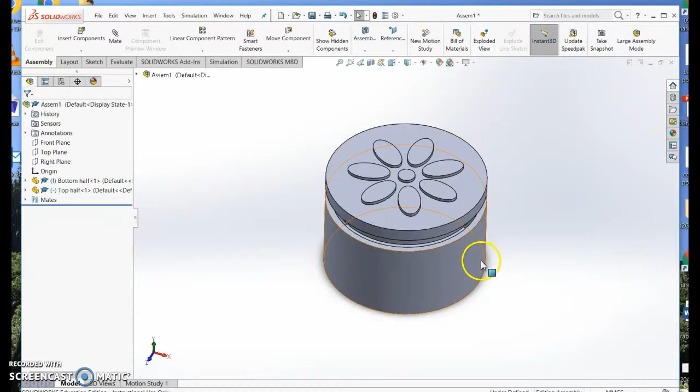Okay, so this is using a program called Solidworks to create a three-dimensional box that you're going to be able to 3D print. So here's a little circular box I've created with a lid. Now I'm just going to take you through how you can create a box very similar to this.

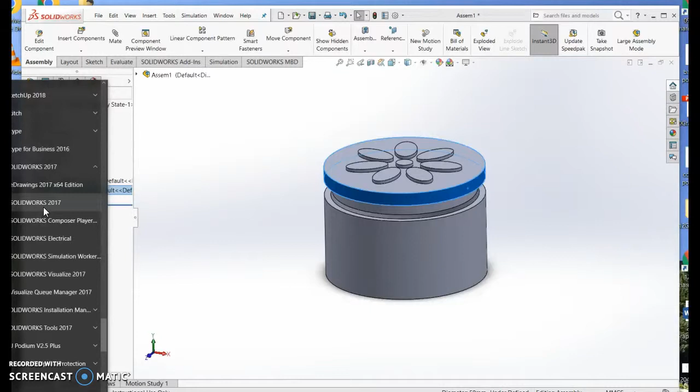The first thing you're going to need to do is find the Solidworks software. So go to where all your applications are, scroll down to Solidworks, and it's Solidworks 2017 that you want to open. Once you've got it open, you need to create a new part.

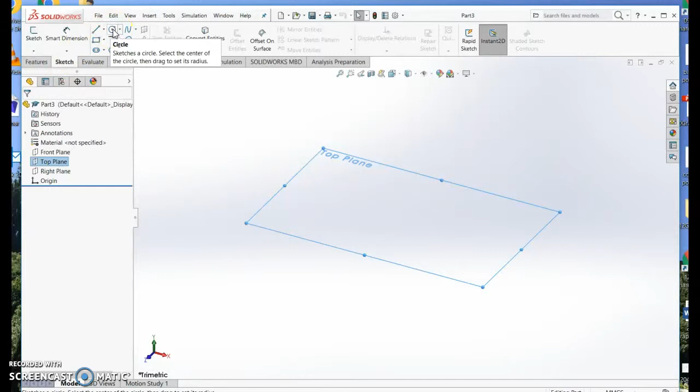Okay, so Solidworks works off starting to draw sketches on planes, and then you turn them into 3D features. So these are my main planes I can choose from: front plane, top plane, right plane. We're actually going to start drawing on the top plane. So you pick a plane, start a sketch. These are my sketch tools here. And in this case, we're going to choose a circle for a start. Attach it to the middle, just so it knows where it is in space.

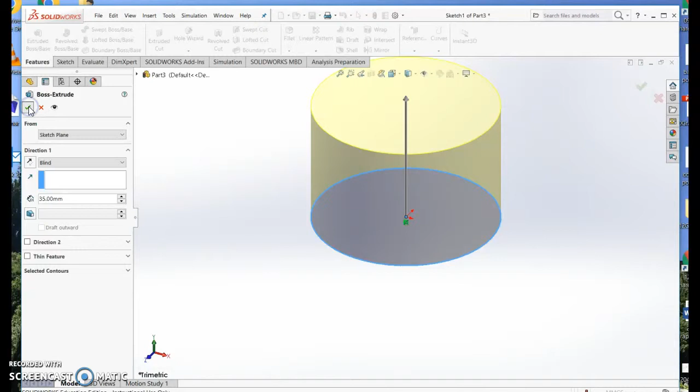And you want to make it with a radius of about 25-26 millimeters. Tick. So I've done my sketch. Now I turn it into a 3D feature by extruding. And I can click up the right amount that I want, or I can type in. So maybe I want it 35 millimeters tall. And tick that. Try hitting the F key, F for fit, and it makes it fit to the screen. Z zooms it out, and Shift Z zooms it in. So here's my beginning of my box shape.

Now what I want to do is cut it in half to make a top half, a lid, and a bottom half. So now I'm going to choose the front plane to sketch on, which is right in the middle. If I press down the wheel of my mouse, I can spin it round, so I'm looking straight on at it. So I've picked my plane, I go to my sketch tools, and I'm going to draw a cut line, and I want it going right the way across. Whoops, select the sketch tool.

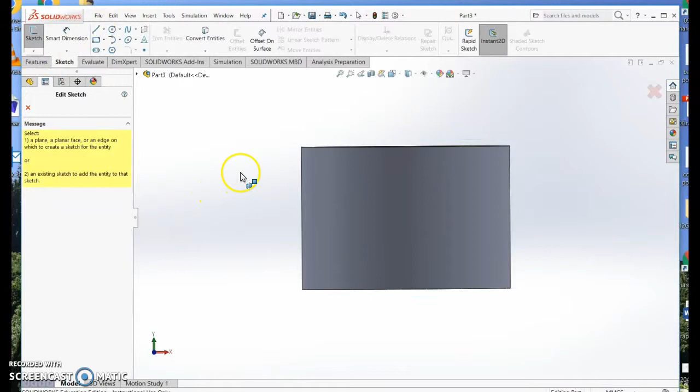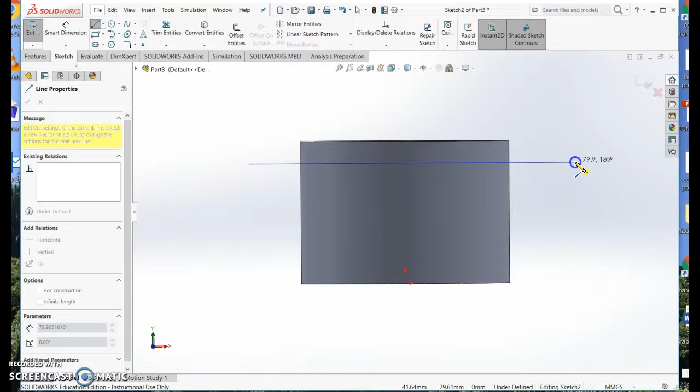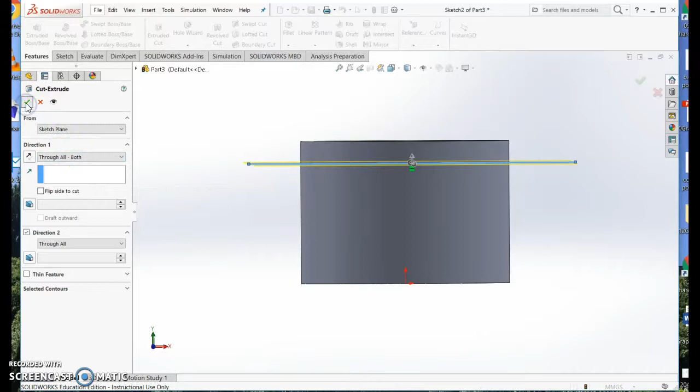Select the line sketch tool, and I'm going to draw a line going horizontal. I can tell it's horizontal because it gives me a little symbol and tells me it's 180. Now I need to make sure the line is hanging out each edge. Now I turn it into a 3D feature, which in this case I want to cut the object in half. Down in my properties here, I want to choose through all, both. Tick, and it's cut off the top.

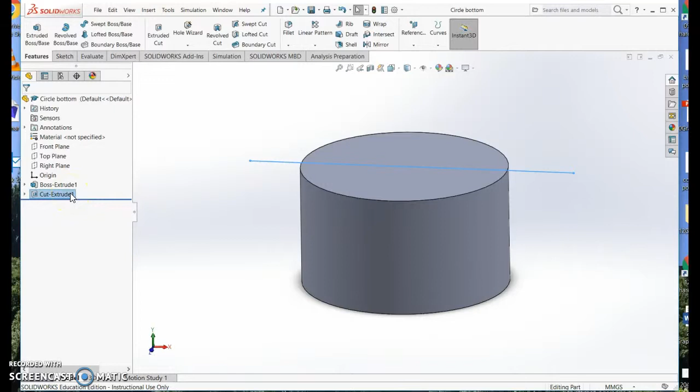So now I'm going to save that as the bottom half of my box. Circle, bottom. Save. Okay, now I'm going to edit that cut I made. If I right click on Cut Extrude, it lets me edit that feature. And I'm going to select Flip Side to Cut. And that means it's going to cut off the other half. So now I've got the lid left. File, Save As, Circle, Lid.

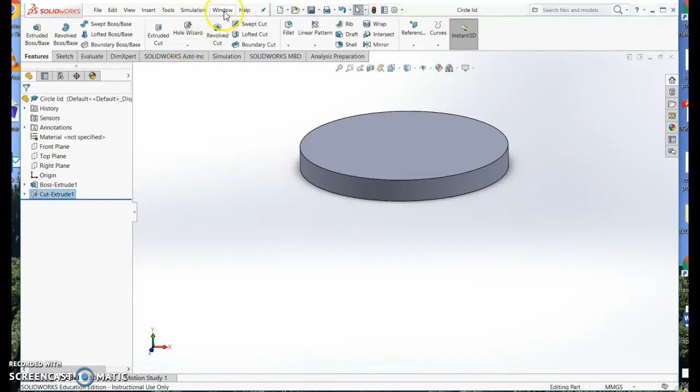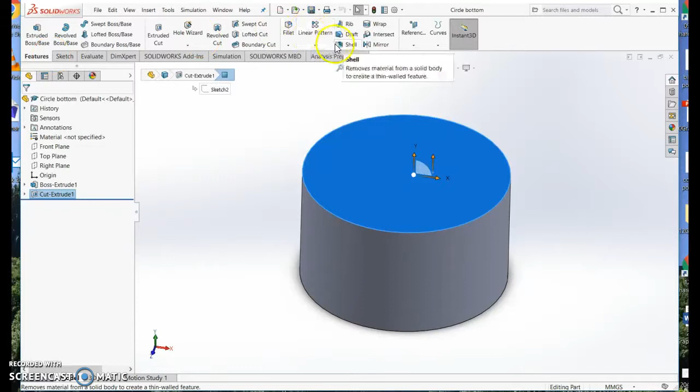Okay, and I'm going to just reopen the circle bottom that I made as well. So that's the one I made before. Now for this to be a box, I need to hollow it out. So I'm going to choose the top surface, and under Features, I'm going to choose Shell. And I think about 2 millimeters thickness is a good idea. So just tick that, okay, and it's hollowed out my box. Save that again.

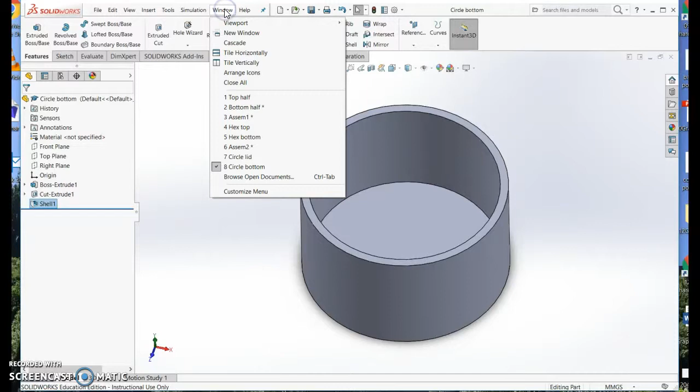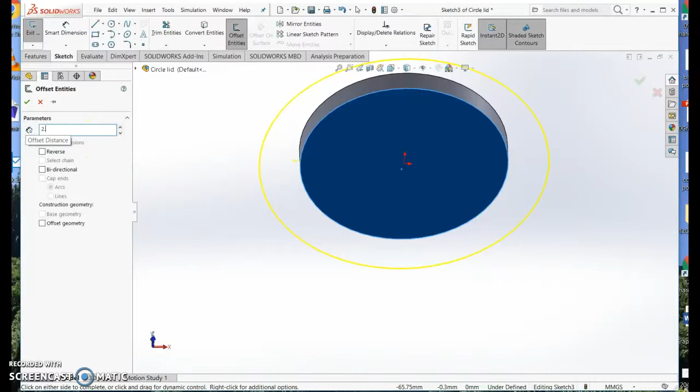Now I want to make the lid to match. So I'm going to Window and I want to look at my circle lid. Now I want to put something underneath so it clicks onto the box. So if I pivot it over and choose the bottom surface, I can make a little insert. So I'm going to choose Sketch, turn on my sketch tools, and I want to use this one, Offset Entities. And I want to put 2.5 millimeters because I want to make a circle a little bit smaller than the shell of my box. And I want to hit reverse so that the circle goes inside.

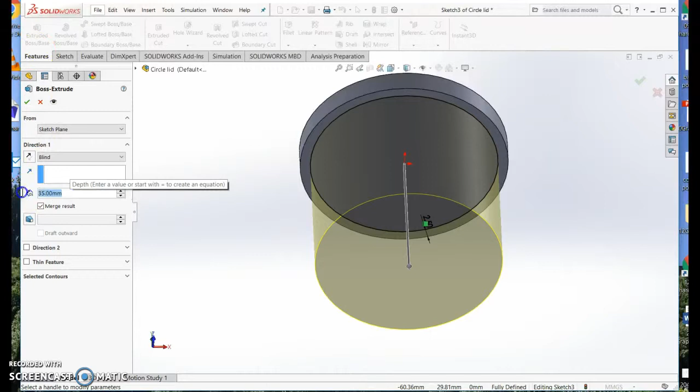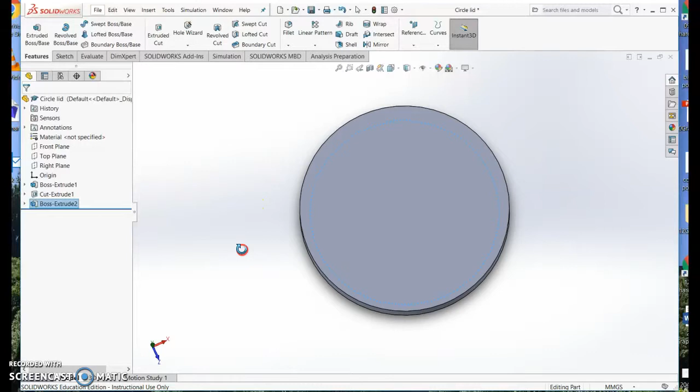Now I go to Features and Extrude, and I'm going to go down about 4. Tick. Okay, so that's now my lid with a little insert so it sits inside the box really nicely. I'm pressing F to make it fit to the screen. Now I want to put something interesting on top. So I can select the top surface and use sketch tools to create something. Just make sure that the sketch lines don't cross over.

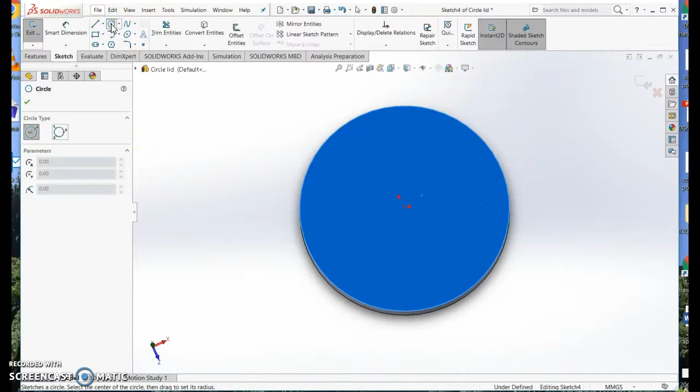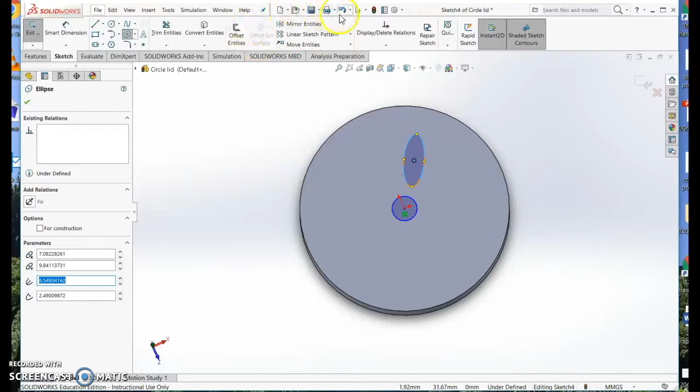So I could draw a hexagon, I could draw just a spot on it, I could make a little handle that pulls off. Or I made a flower before, and I did that by choosing the circle tool, tick, and then I used the ellipse tool to make a petal, maybe to about there. That's totally not what I want, so I can use the selector tool to just, there we go, that's looking a bit better.

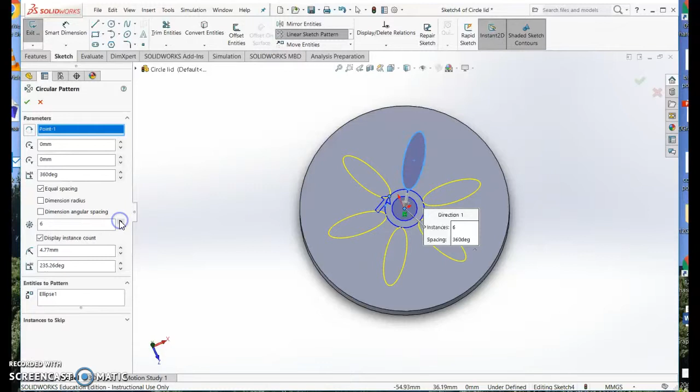Now I want that repeated, so the easiest way is to pattern that around. So select just the ellipse, and under the sketch pattern, change it to circular. And you might find you need to choose that point or the circle edge to go around. And I can change how many petals I want. I usually like an odd number. Okay, so it's really important that the sketch has single lines and none of the lines crisscross over. Otherwise it won't extrude properly.

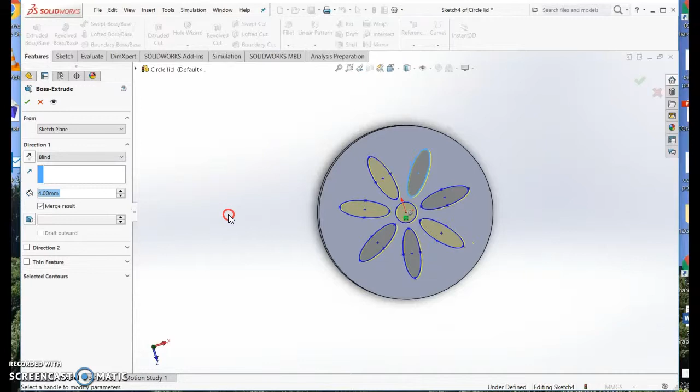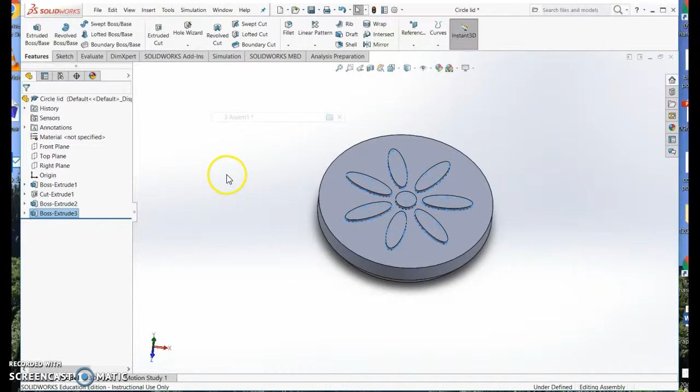So now I can go to Features, and I could either engrave it in a bit, might look quite nice, like a cookie cutter, but I'm going to emboss it a bit. Just make it stick out. Okay, so that is my lid, and I've got the other bit to match. So basically, I now have 2 parts that should fit together nicely like that. And there needs to be a little gap in between so it can go in and out and not get stuck.

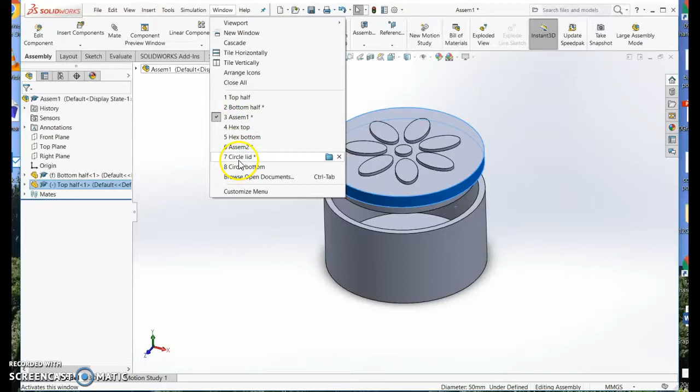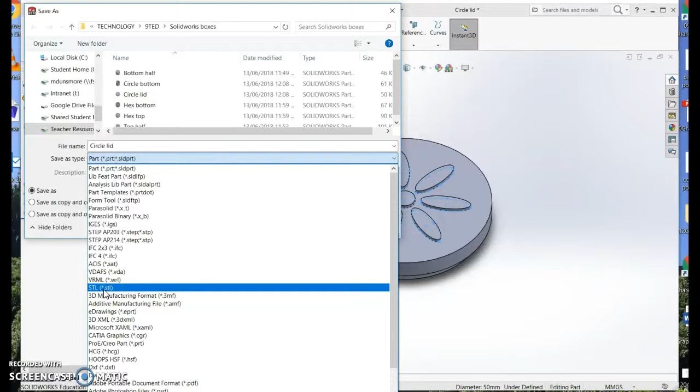Now my next job is to save each of those files so that they're able to be 3D printed. So I should have saved them as Solidworks parts, but I also need to save them as STL files. So go Save As. And this one here, STL, this is the type of file that a 3D printer can print. So I can save that. Definitely all bodies. And then I also need to save my bottom bit as an STL. Then I will be ready for printing.